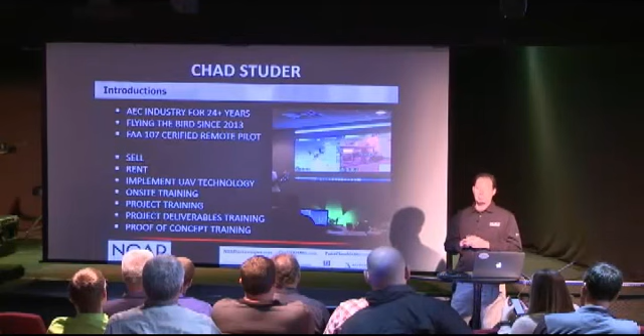All right, so now for the UAV and drone portion of the presentation. I kind of told you about my background with scanning. I've been flying the UAVs for a little over almost 5 years now. I am an FAA certified remote pilot. How many pilots do we have in the room? Wow, quite a few, right? So it's not too bad.

It's a 2-hour test. We'll be more than happy to help you. We have PowerPoints, study material to help you pass that test your first time. You can sign up pretty much anywhere and take the test. I think we ended up over in Canton just because we signed up for whoever could get us in immediately. I think it was August when they first announced the rules that you could get your certified pilot license.

We also do training on the drone. So if you buy a drone or before you buy a drone, you can come in, do 1 day. We teach you everything about the app. And it's not just flying it. I think if we go out in the parking lot and you fly the drone once, you feel like an expert and everybody knows how easy it is. Right? There's not much to it. But there are safety reasons, precautionary things when you're on site that you want to take a look at.

What happens if the battery goes dead? What happens if you lose connection? Just the things, why doesn't it connect? There's a ton of other things in there that you want to be aware of. When does it automatically return home? Is it 20%, 15%? So there's a little software package that we introduce you to. We help you pass, or study at least. We haven't had anybody fail yet, but we help you study for the FAA.

And then we fly the drone autonomously, and the second day is all about making deliverables. So extracting the data, taking photogrammetry, and creating geotiffs, point clouds, and kind of everything I'm going to show you today to give you an idea. We do online or on-site training, project training, as well as if you had a project you just want to try it out before you buy it, we would help you out on that as well and make sure it's delivered properly.

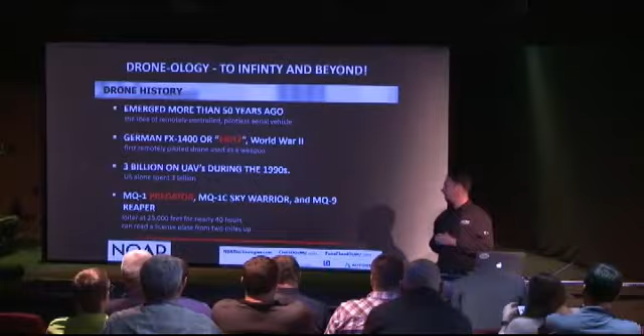It's a little fun here before we get started, just thinking about drones, and it feels like it just popped up yesterday. I think was it 2 years ago already? Amazon was, right before Christmas, telling everybody they're going to start delivering packages. Has anybody had a drone deliver anything yet? Right? So it's here before you know it. It's like the autonomous driving vehicles, right? The driverless cars. It's the same technology. It's just going to be here one day. We're going to wonder where it came from.

Well, if you take a look here, drones have been around for over 50 years, right? World War II is pretty incredible. If you look at that dollar amount, $3 billion, I kind of see why now my remote control airplane goes up in the air and it doesn't crash all the time. And it's remarkable what the military is using.

The Predator, think about it, it's just sitting up in the sky at 25,000 feet, and it can sit there for 40 hours and read a license plate from 2 miles in the air. Right? So is the government spying on anybody? So it's incredible what the capabilities are. Of course, ours aren't quite that cool, and they don't cost that much. But the idea of a drone and what a drone does is different than the way we think of a drone. Right? This is where the military is using it.

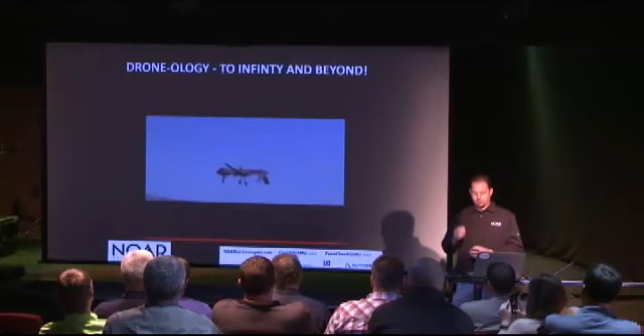They're sitting in the combat or in their own little zone here in the cockpit area, and they have a target that they're going to try and hit with it from 1,000 miles away, wherever they are. And it really makes you think differently when you use the word drone, what's going on with it in the military, how they came around, right?

I better turn that off real quick.

So right, they're blowing things up.

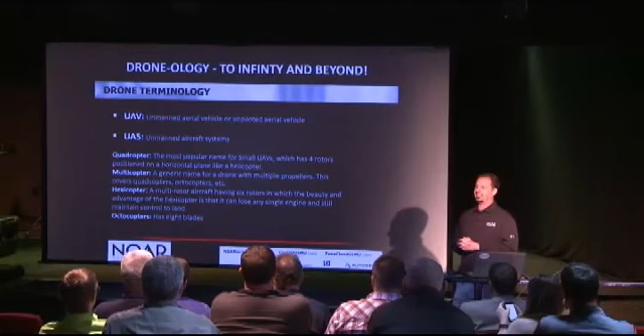So the idea of the name drone - some people say politically we don't want to say drones, we want to use UAV or UAS. I still use drones in all my marketing because that gets you more hits on YouTube or Google than anything else, so I'm going to keep doing that. It just sounds way cooler, but there's really no difference in terminology. I guess the military isn't going to say they're going to go blow something up with a UAV, right? In their language, quadcopters is what we're using.

Over there in the bottom is an Inspire, so it just has 4. As you look around the room, a multi-copter, a hexacopter - hexacopter of course is 6. We'll talk about the different ones we have up here as we move along, but of course there's also octocopters. Over to my left, I'm kind of hiding it, but this is a fixed wing as well. I don't know if anyone gets a chance to come up and take a look at it - should have hung that thing on the wall for everybody to see a little better.

So a couple simple things - you've got to fly the drone. A lot of people think it's complicated, so I want to point out how easy it is. The Inspire, even a Phantom, they're this big - I think we have one on the table over there. Most sites are 10 minutes, right? Typically if you use the Inspire you get 30 minutes to fly a site. I'll show you one we did in 10 minutes - it was 50 acres that we were able to capture.

It was a beautiful sunny day, so it was actually traveling autonomously at 32 miles an hour. That's the fastest I've seen it go, but that was outside of Michigan because it's always cloudy here. What happens is it flies, the camera has to focus, and if it's cloudy it will slow down maybe to 10 miles an hour. So it does depend on the weather how fast it can go - between 10 and 32, the weather can vary how much you capture in one day.

What kind of data do you get? Most people are going to talk about videos or just regular photos. Think about a geotiff, so it knows exactly where it is in the real world and you can drop it right in. Also 3D point clouds from photogrammetry - you can deliver 2D and 3D, and we'll get into this more as we go. But right now we just want to focus on photogrammetry, which is what we're using on any of the drones you see in this room.

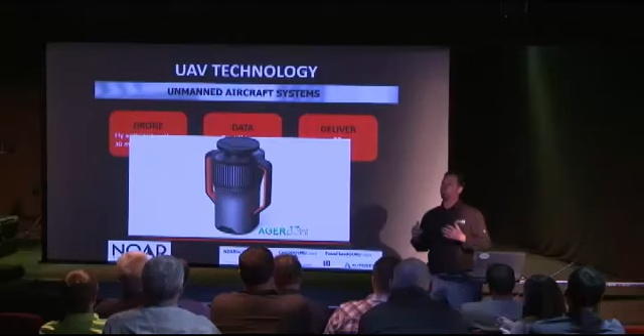While I was at SPAR, This is the one that intrigued me the most. I have absolutely no idea if it's any good yet or not - they had no sample data. They were just bragging about this being the next LiDAR data unit that you could put right on your drone. So we're anxious to see where this goes, and we're going to keep an eye on it, and we'll of course let you guys know if we throw this in there and get it working as well.

So anything, if you're flying autonomously straight down, you would have shadows, and you're not going to see everything. You won't see the side faces of the building, the windows, or the walls. It's going to block a lot of this. So you have to fly it to actually look at everything you wanted to capture in order to be able to put it together.

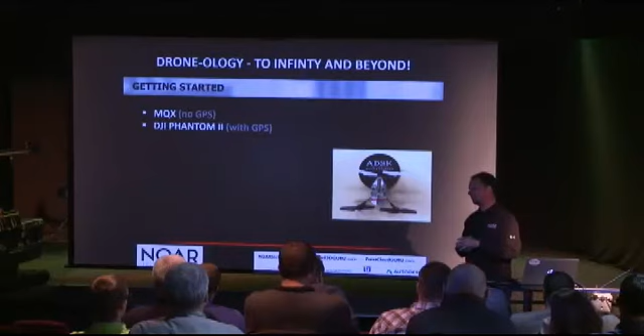I could do it, but I still wasn't good enough to go do projects and brag about it. Luckily, the DJI Phantom came out. I don't think we have this one, but we have the Phantom 4 back there now. And I just went out and bought it.

I had $1,500 in this little unit, no camera on it, no GoPro or anything. You couldn't see where you were flying, right? You didn't have the heads-up display on your screen, which was a good thing because I actually watched the drone. Most crashes these days, you're not watching the drone, you're watching your screen, and then you run into something. So it's kind of an old school lesson that you can learn to make sure you watch the drone. Turn off the heads-up display.

This has GPS in it. Has anybody flown a Phantom before or better? Almost half of you, right? So everybody knows how easy it is. You literally throw it up in the air, and I can talk to you and everybody in here, and it just sits there and it won't move. The wind comes by, it moves it, and the GPS moves it right back. It's instant response. Move it up, down, left, right. It stays right there. All of a sudden, I was an expert, just like that.

Just make sure you fly outside, right? So then once you become an expert, you're ready for the next toy. We moved on to the Inspire 1. A couple advantages of this we'll talk about.

A facade inspection, a little over 400 feet tall. You're looking up and you're trying to watch your drone. You want to make sure you're getting good information on the camera. Well, as soon as you take your eyes off and look back up at 400 feet, it takes a few seconds to locate that UAV again, that drone, and it can be hard to do, very difficult.

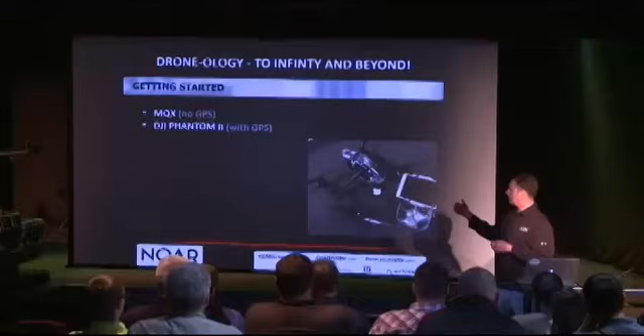So this is the only drone that I can think of on the market that has two controllers. One person is watching the drone, and the other person is just controlling the camera and making sure you're getting good video or good pictures of it. The other advantage is it has landing gear, so we go outside, it goes up in the air, and your camera never has the props in it. That was kind of a problem with some of the older Phantoms. And this camera does go up a little bit, left and right, and you can turn it.

So I said it was easy, so I wanted to test it out. This is my little girl. I think she was probably 3 at the time when she did it. She passed. You know, she doesn't have a remote pilot license yet, but we're working on it. I took it a step farther. He loved it, he thought this was the best thing ever. We have one of these on the desk if anybody wants to get it out, or Paige, if you want to break that out.

It's literally a Nano Drone, $20 on Amazon. If we get time, I'll fly it up here and show you guys. It's easy, buy 2 of them. The first one is practice, and I guarantee you crash it and break it. The second one, you'll get the hang of it and start using it to give you an idea. And just to repeat how much fun it is, you can see no matter what age, it's never a bad time to jump in and get started here.

All right, so as you're moving up, we're kind of looking at the different UAVs. You're really looking at the sensor, what's the megapixels on the camera? A Phantom 4 has a 20 megapixel camera, and so does an Inspire. So why should I get one over the other?

Depends what you want to do with it, right? What are your goals, what are your projects? The biggest difference for us was the 2 controllers was nice. Also, when you land a Phantom, it has a really small base, so when it touches down, it can kind of fall down or flip over, hit the props.

So we see a lot of people in the field trying to catch them out of the air. Well, then you're going to have a problem with somebody getting hurt. One of the times it's going to get their fingers, different things. You can also fly in stronger winds.

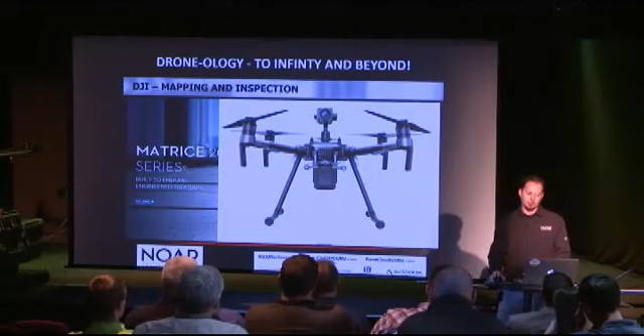And we'll talk about some of the accuracies later, but RTK is going to get you much more accuracy without any ground control. Ground control is still going to make it much better at the end of the day, so we always believe that you should use it, but if you had a site where you couldn't do it, RTK would really help.

Anybody see the Osmo yet? Anybody own one of these? Not yet? So we had Inspire 1. We updated the camera, so we had the camera laying around. It's 12 megapixels. We have one on the back table. If you guys get a chance on break or before you leave, take a look at it.

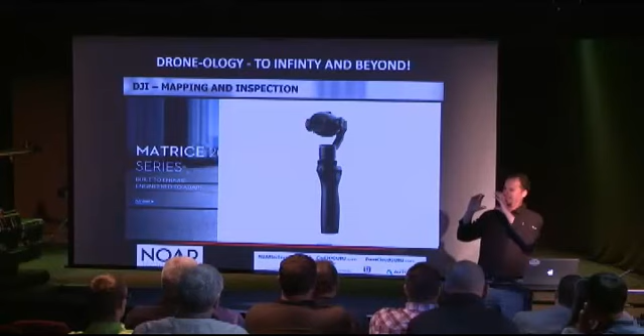Everybody's grown up. As a kid, you look at your Christmas photos, your birthdays, and what happens to every one of your cameras when you're watching that movie? It's up here, it's down here, it's over here, right? It's not steady, it's shaky. Or you're in the field and you're trying to drive a car and film something. So this uses the UAV gimbal. So as you walk, it knows to adjust if you're moving your hand up and down.

So if you're on a project site or need some good information or just want to do your kid's birthday party, this is the way to go. I think they're only like $450 maybe. Depends what camera you put on it. And then you just hook your iPhone onto the side so you can actually see what you're recording. And if you spot something and you put it on an object, you can literally walk around it and it will stay focused on that object as you walk around, which is kind of cool.

So I don't know if it's just me or not, but it feels like DJI has just taken over the world lately. I wish it was a publicly traded company. Everything, how fast they can put out this new technology, it's even hard for us to keep up. The newest one is the first-person point of view glasses.

So the difference between Inspire 1 and Inspire 2: when we got the Inspire 1, we had to look through our controllers to see where the drone was and where the camera was. If I'm flying the Inspire 1, I could only see what the camera was looking at. So if the camera's turned to the right, I'm flying blind, okay? The Inspire 2 has a heads-up display camera in the nose, so you're always looking at what the drone's looking at, and the other controller is looking at the camera underneath. So that was a nice little thing that they changed or updated on the Inspire 2.

Now imagine you're flying, and while you're flying, the person next to you puts on the goggles, just like we had earlier, which immerses you right inside the view of the camera. So now you can turn left, turn right, look up and down, and it's going to adjust the camera on the drone to what you want to look at, right? Structural analysis: I'm just a pilot, I don't know anything about structural analysis. I just fly over there, and the engineer could actually look and see what they want to look at, right? They could focus on this area without even knowing anything about the UAVs.

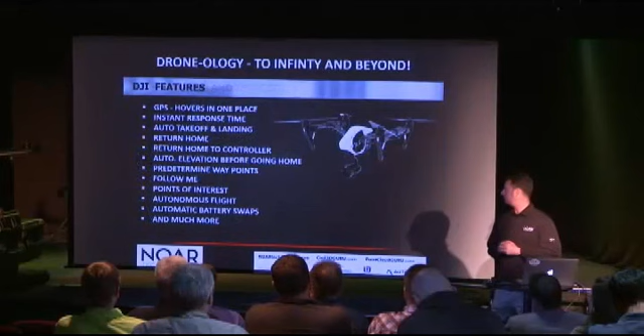Cool stuff coming. We were talking at the office, I'm just going to open something like an Apple store. There's going to be a DJI store soon. You're just going to go in, fly drones, cameras, look at all this cool stuff.

Any of the DJI drones that you purchase, and a lot of UAVs, have some of the same things. We talked about the GPS, hover in one place. We won't go through all of these. What I really like is there's auto takeoff, auto landing. So literally we go out, we map autonomous flight. You hit start, it automatically takes off from a Google map, flies autonomously until the battery goes low, automatically comes down, take the battery out, put another battery in, say resume, goes back up and does it again. It automatically lands within 10 feet from where it took off as well, right? It's crazy what they're doing.

The auto takeoff and landing is fun for some people, but it takes all the fun out of it, especially with an Inspire. You have to land it yourself. That's part of flying, right? We have to have a little fun while we're out there.

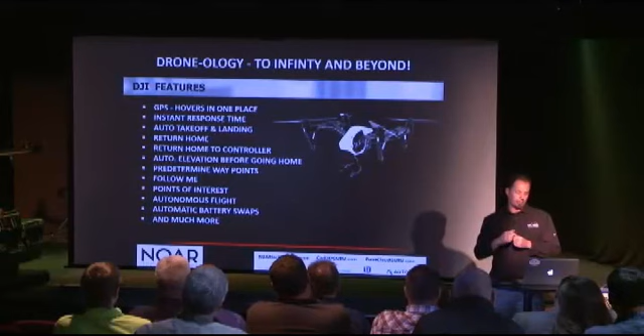Return home: if they lose their connection, they come back home. But it's also cool that you can update it to come back to the controller. So if you're walking with the drone, it won't go 2 miles back to where you started. You can update that home position. It would stop at the end of the project and come back to you if it got low on batteries or you weren't paying attention.

One of our favorites, or a fun one, I wish Tyler was here today because of the way we tested it. We put him out in the parking lot. There's a new feature that says follow me. So you take the drone and you say follow this object. And we said run, and he thought we were joking, then he took off running. The drone and the camera focus on that object that's moving, and it literally followed him through the parking lot.

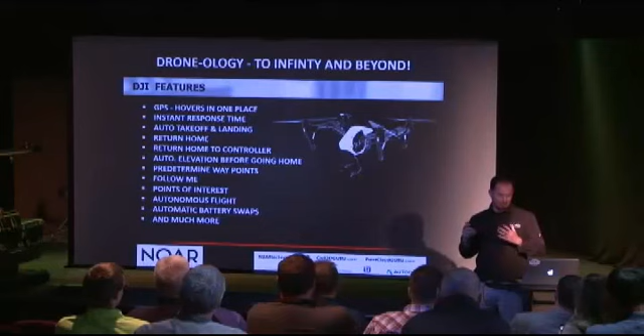I'm just glad I'm growing up these days, not back in my younger days. There's too many ways the cops could follow me now, right? With emergency and rescue, you can't get away from anybody these days, especially with a thermal camera. Now they're going to follow me with thermal, with a UAV.

So a lot of different things. I think we mentioned most of them. I thought this was one of the most intriguing too. I haven't tested this yet. I don't know if I will ever test it.

I guess before we talk about this one, there's object avoidance. So if I try to fly it right into a building now, it will literally stop 10 feet away from it. We have tested this. It took us a little while, we did it kind of slowly, but it works. It also works if you're flying 100 feet in the air and you're just slamming it down as fast as you can. It will automatically stop the UAV for a safe landing. It won't let you crash without the landing gear coming down, which is kind of cool.

But the best part about this is we used to fly behind a building. Let's say you're always supposed to keep eyes on your UAV, but if you were behind a building and you lost connection or you hit return home, they weren't very smart. They come straight home, so it actually hit that building, right? We had one, one of the first ones I delivered. We flew it, and then the client got the battery, put a new battery in it. It was the only one I didn't really fully charge.

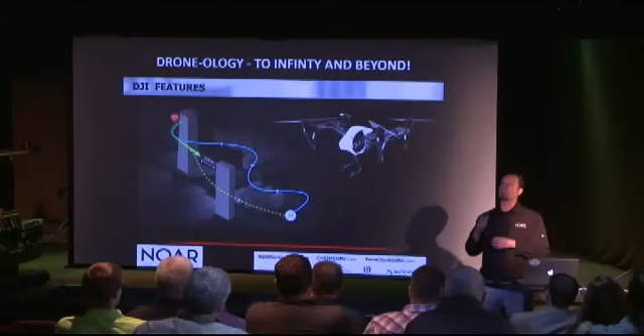We're walking around the building, all of a sudden the drone's moving. He goes, Chad, that's not me. That's not me. I'm not this bad. And I look, and the battery's low. And next thing we know, it's trying to return home. And it gets to the top of a roof, and it just lands on the roof. And it goes up again and tries to land and stops. So we had to get a ladder out to get the UAV back, right?

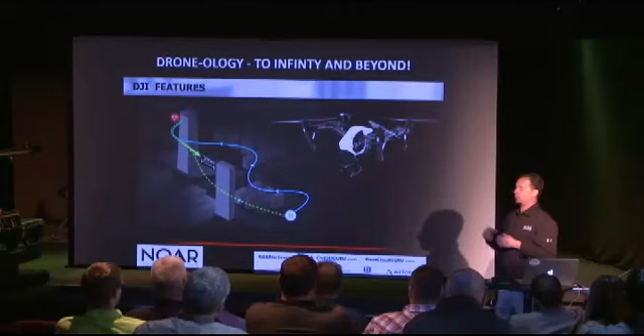So they're smarter now. And when they come home, they're smart enough to detect objects up to 200 meters away and fly back safely. I think that's remarkable for what they can do. Again, it'll be fun. Maybe we'll record it and put that on YouTube for you guys to see if it works out for us the first time, right? Or does anybody have a drone we can borrow to test that first?

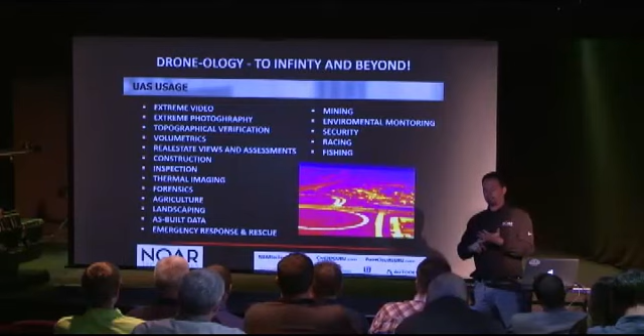So a couple things I want to talk about. As soon as you buy your UAV, the first thing you typically do is check out the camera, the video. When you talk to people, hey, what are you doing with your UAV? There's different types. There's mapping, there's inspection, but then there's others just using it for photographs, marketing, and video, right? A little bit different. Kind of separates the two a little bit. Although we have done some really cool things with video, and we'll talk about how you can use it.

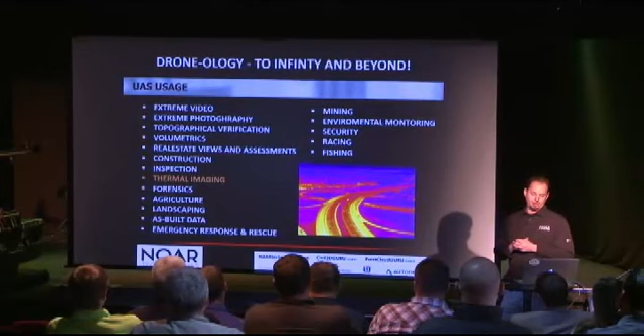Thermal imaging, like we said, will go on the Inspire 1 or the M200. We were lucky enough to put it on ours as well. We actually did some roof inspections. I just didn't have time to load all that in there, but we will get to that. Or if you need to see it, we can show it to you. We're hoping to do some really cool projects or test projects in the future. This was just out at our office, and just for fun, we wanted to see what it would look like, and you can see some of the buildings.

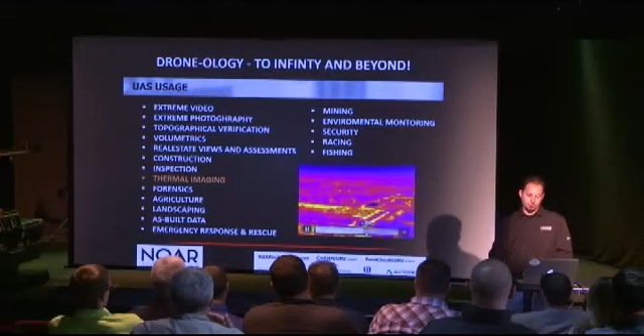The biggest problem is the resolution is only 640 by 480, so we're seeing if we can make point clouds from it and what you can get from it. So this was during the day, so you don't get much. It is kind of cool. I thought I had the highway, 75, in here, and you actually see the cars driving, and you can see the heat from the cars. I'm not over 75, it just looks that way. The 75 turns, but it's kind of neat. So if you want to see more on that, let us know for sure.

And then I'd love showing drone racing, but I talked too much yesterday, so I wanted to minimize this a little bit. Has everybody seen drone racing videos yet? A few of you? One of the best things you can do this evening on your way home, if you're a passenger, take a look at drone racing on YouTube. They're literally looking through the eyes of the camera, and they're flying very fast. They're little 2x2 boxes in arenas.

I definitely wanted to do that. I literally wanted to go. We turned the car around because I was afraid I'd have a new hobby, and I don't need another hobby, right? It just gets addicting to have that much fun.

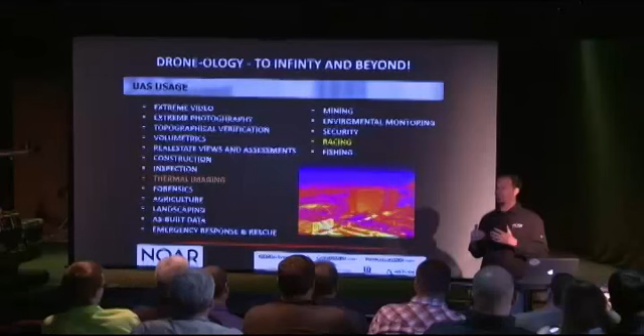Also, downtown Detroit, they're going through abandoned buildings. So if you look hard enough on YouTube, you'll find them. We're going to try and gather all these videos and put them on our channel and just kind of send you there in the future to see the best ones.

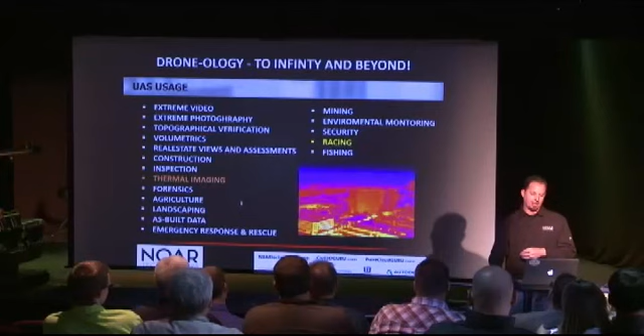I think the fishing one is very cool too. I think it's Florida. These guys are out on the beach, and they tie the bait to the drone, and then they fly out as far as they can. It's like a fish finder, right, with their camera. And they look down, they see all this tuna, and then they hit the button, it unlatches it, drops it, and then you see the tuna eat it, and then they just bring it in.

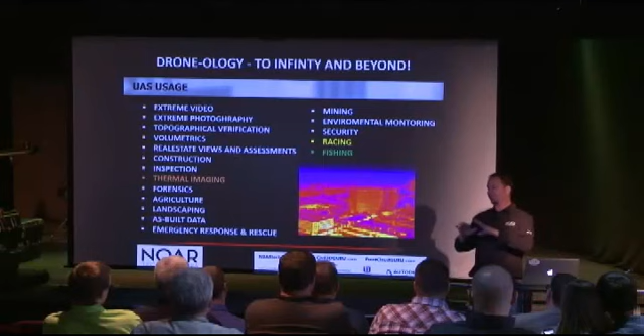Right, it's remarkable. I don't think it's legal. I'm not condoning it, but it was cool. One of the other really cool ones that I saw was someone was actually fishing, and the guy got mad because the drone was bothering the fisherman, so he cast it out, and he actually caught the Phantom, and they were arguing. They're going back and forth with it, so that was up there too. You can go all day with the videos up there and what people have done with the drones.

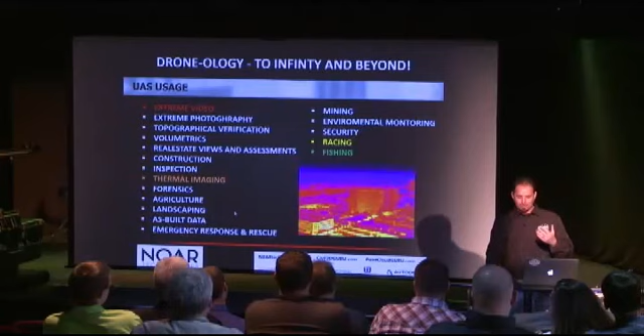I remember one headbutted a goat. I mean, it's just incredible. Thermal camera saving turtles. It just goes on and on. It's pretty neat. So when you talk about extreme videos, you could look all day and see if you could find the most extreme video, but I had to find an extreme video that related to mapping and inspection as well, not just a dirt bike or some mountain climbing.

So I was actually flying a communication tower with a client and kind of showing them how to use a UAV to do this. So this is my extreme video. If you look real close at the hawk, slowed it down just so you don't miss it. So if anybody asks you, are drone inspections any good, you can say it's the poop. Right? So we'll play it one more time just for fun.

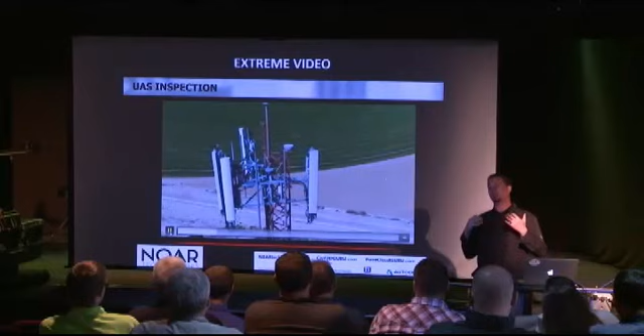The best part about this whole story, we didn't know it. When we walked up there, we saw the hawks. We knew there could be an issue. So as we got, makes me laugh every time. So when you get up there, I don't know if we're going to be able to fly it. There were actually 2 hawks. And as the drone gets up there, you could see the hawks kind of watching it and circling it. You know, from, I don't know, 350 feet down, you can't quite adjust or see the elevations. So when you're flying the drone, the hawk was literally starting over here, and it would go right at it.

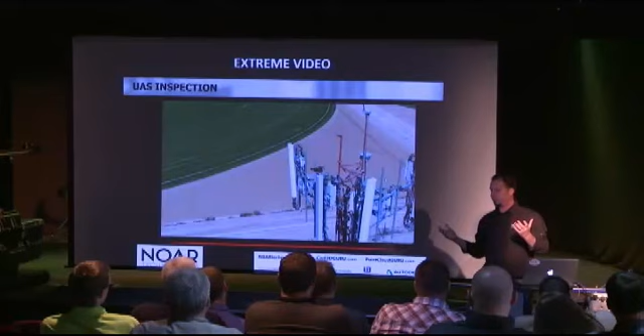So my only choice was, I had a flight to catch. We had to get it done. So I would just give as much gas as I could to go up, and I was just hoping it was missing it. But I tried it 3 different times. I wish I would have turned the camera right at it to see what it was really doing. Luckily, it didn't affect it in any way. It actually sat back down there, and we were able to finish it up.

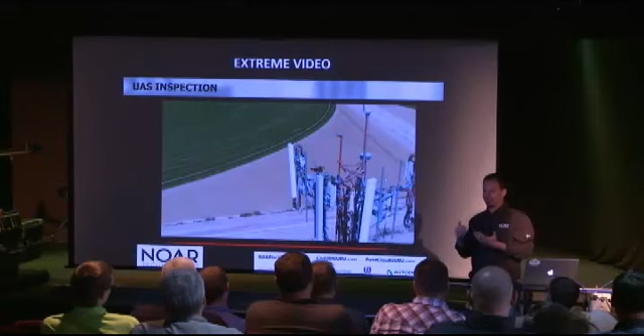The best part was I get to the airport, I see the hawk, I take a small clip, I send it to the client. I said, hey, look at this. This is incredible. That's pretty neat. He goes, Chad, that's not funny. I was the one on the ground doing all the mapping and the groundwork, and I thought it was just bad weather. It started raining. Now I know it wasn't raining. I couldn't believe he admitted that, but it made the day.

That was pretty funny. So our other extreme video here real quick is the Cadillac, the Book Tower in Detroit. I don't know if everybody knows about this building in the past. Dan Gilbert actually bought this. And if you think about it, and the more we learned about this building, New York City is doing mandates. I think Cleveland, Ohio is doing mandates that they have to inspect the buildings. I believe it's like every 10 years or 15 years that you have to do this.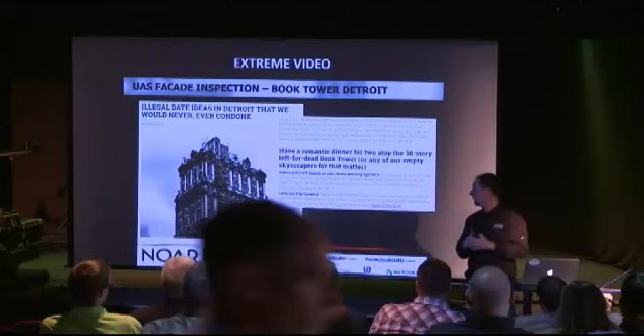So how are you going to inspect these buildings? And think about if you want to get insurance on a building you bought. What's the condition of the building? If you have a big storm, who's going to pay for that if there's damage? Was that existing damage or wasn't that existing damage? Especially when you talk about these kind of prices to purchase something like that.

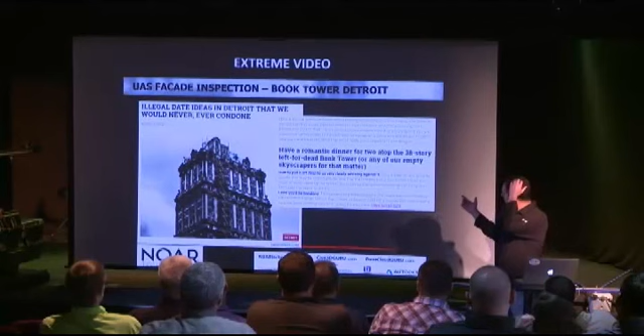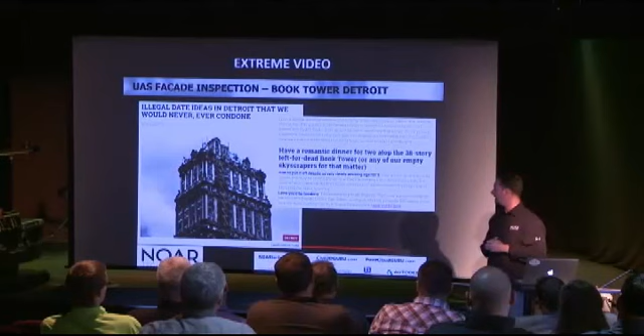So after we flew it, and I came home, I told Michelle, my wife, all about it, and she found this article, and we thought that was pretty neat too, where people in Detroit are actually going for, I don't know if it says cheap date or impressive romantic date. There's no elevators. The building's abandoned. They're walking up 38 flights of stairs to eat dinner, to have a picnic. I think I'd make it 10. Take me a week to get to the top, right? And I just want to know what date is actually happy with that to do that much work. But that was pretty funny.

So to give you a better perspective how big this building really is, I thought that was a good picture for it. And this kind of puts it in perspective a little bit. So this was a couple years ago already. This was actually, I did the Fisher building, so this was the second one we ever did. We did the dual controllers.

But you have to remember when we did this, we didn't have object avoidance. So I couldn't just go sit there 10 feet in front of it. It was just on your own. So if you hit the building, you're going to hit the building. I love how you look at the statues as well and the condition of them. And this is easy for an insurance company to go back and take a look at this. You can extract every photo from the video, and then you could zoom in on every one of these photos as well to get much more quality if it's needed.

And I still can't believe the amount of detail that they put at the top of these buildings. Right? Who can see that from the ground? So unless there's another skyscraper, you wouldn't even see this. We get up there, you start seeing the graffiti, so people are up there. They're going all the way up to that penthouse. I believe this is a working penthouse now, from what I heard, or it was for sale at this point for the top of that.

But it's pretty incredible. So think about if you're going to do facade inspections, you have to do scaffolding, right? So what we heard is they started doing scaffolding on this building. At the end of every day, they start the next morning, you had to check your gear. You had to walk up all 38 flights of stairs to start your day. So imagine tomorrow when you go into work, you think you're having a bad day. Think about what those guys had to do, right?

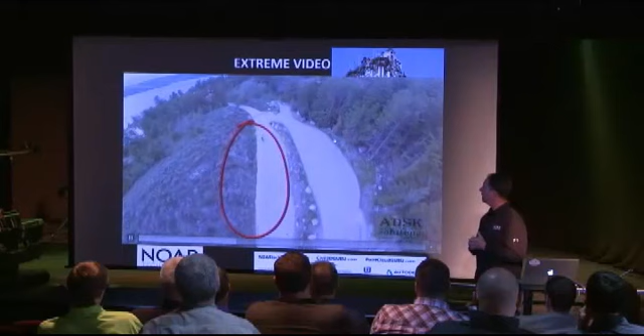So this was a park in Wyoming, a state park we got permission to fly. The real project and why we're really there is the Pro Scan, that they were actually pushing this cart and capturing it like mobile mapping. And they just had to get the limits of all the asphalt and the gravel. And while we were there, one, I got to fly a drone legally at the time with permission, so we couldn't turn that down. And it just validates it for the client that they got all the picnic tables and the information was there.

So I forgot to show you when we started, it was no wind at all. 2 miles later, you can see the storm came in very quickly. There's actually white caps in the water now. I was still back in the days of the Phantom 2. Notice the wind over there on the right. All we have to do is get to the back here, and we're done. So we're like, let's keep going, just keep going. Well, how do you do 2.5 miles where you have to keep eyes on it all the time?

So I had one person drive the truck, and I sat as a passenger and flew the drone while we were in the vehicle. The wind was so strong. Look at your bottom left. The Phantom wouldn't go anymore. It just stopped. So I got out, and it's easier to navigate from behind a drone. Made the mistake of trying to turn it. The wind caught it. Luckily, it was above the tree. So if it's windy, just come straight down so you guys know. Don't make that mistake. I got off easily on that one.

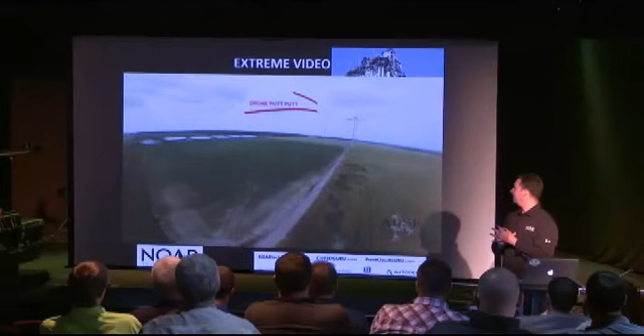So my in-laws live in Bad Axe, Michigan, so while we're up there, why not? We got to have a little bit of fun, right? Unfortunately, Michelle was with me, so I didn't get to actually run through them or actually do the putt-putt. And it's private property, so she made me park over 400 feet away. So if you see here, from a GoPro perspective, you'll see how far away we were and still able to get incredible data on these wind turbines. So there we are way back there at the point, right?

And we're standing at that location as well. But that was a good experience. I still have a goal of doing wind turbine putt-putt.

But I heard it's not the drone you got to worry about. If you chipped one of those blades, someone told me how much they were at one time—it's insane. So just cell tower inspection, you kind of saw we did that earlier. Very easy to do. I'll skip through here to see if there's any other ones.

Stockpiles, we'll talk about a little bit later on. Very simple to fly over. Just kind of notice the mobile is there. Actually, I was with a person there that's in here.

There we go. Did the Mackinac Bridge. Probably wasn't the smartest thing I did a while back when I first got it, but legally, as long as you weren't flying commercially, you could fly in certain areas. So it's all the way in the UP, and on the way back, I was getting tired. I was just bored, so I got it out, and I'm like, I'm going to fly the bridge. I'm going to at least fly to the first abutment, right?

Then I started thinking, isn't the Port Authority like right over here? And then what if it goes down and it's iced over? I'm not going to go get it. But it made for a nice little video.

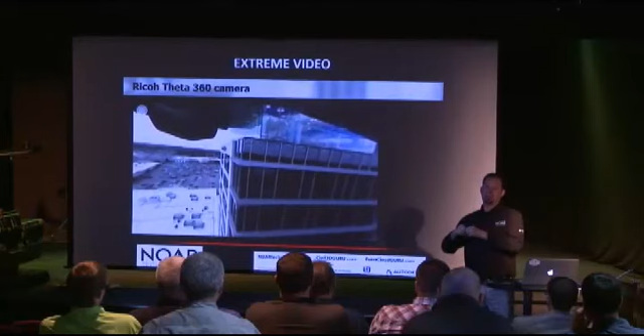So my son just turned 2 last week. So at the birthday party, we set one of these right in the middle of the table. And instead of just seeing his face when you blew out the candles or sung happy birthday, you could spin it around 360, show him everybody that's at the party, and kind of enjoy it. And it's just a lot better environment, so especially for that cost. So that was pretty neat to do.

I can't remember, I think we went around and just did this whole facade on this one. We have other videos we just mapped with it to kind of show everybody autonomous flights as well. This one was kind of cool. So from that location, I just want people kind of thinking mapping and inspections.

You can also do streetscapes. So typically this would be maybe a scanning project, but if it's just conceptual data, this is the one we did in 10 minutes. That entire parking lot, 32 mile an hour, a nice sunny day, and then I flew the face of this building.

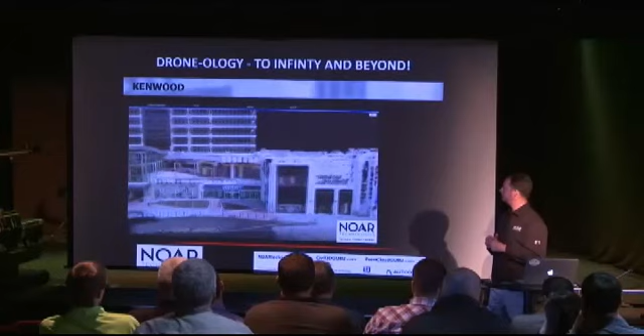So this is all drone data, right? No laser scan data this time. Now I'm making it look good here, right? It looks perfect—why would anybody ever use a scanner? There's a big difference. So when you zoom in, that's where you're going to see the big difference on this.

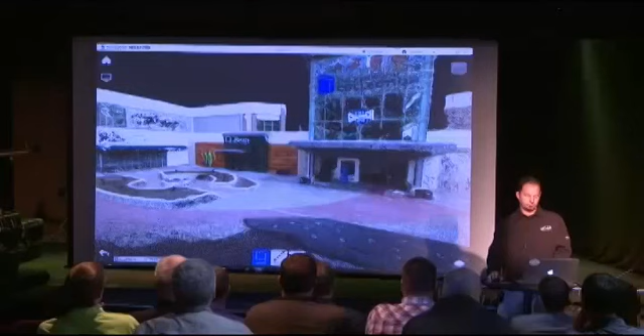Let's see if I got this one. So from here, I mean, it is truly remarkable for conceptual or renovations or stakeholder buy-in. This is all from the 20 megapixel camera, right? Curves—so if there's pieces missing, that just means when I turned it, I didn't turn and get enough photos on that actual face. I kind of did more straight on and then tilt and turned it a little bit as we went. You can see it didn't do quite a good job on the glass.

But overall, depending on what you're going to use it for, maybe you're going to renovate a streetscape, it's an incredible place to start to bring this into different software to help you do that. So the big difference is it looks incredible. Scan data, you can pretty much zoom in forever and it still looks incredible.

As we go in here, you'll start to see this is getting rounded, and it's just not quite the same level when you look at the detail there. See how it's getting a little bit curvy, right? So typically not engineering grade, but depends what you're going to do with it. So more conceptual, more visual information, and you can see it's a little more rounded the farther back you go in the different locations.

But still, for photogrammetry and how quickly you can do that, I think it shows a good picture. While we're here, I'm going to show one other quick parking lot to give you an idea how quickly we can capture information.

I think one of the clients that we did this for is also in here. But this is, I don't even think this is more than a 10-minute flight. We were out there, it was such a simple flight, we actually flew it both directions. So kind of longitude, latitude, or kind of crisscross. So you do it this way, and then you go perpendicular to that flight, and then you just take the photos off the drone, drag and drop it to your software.

It automatically puts it together, spits back a point cloud. Sounds easy. I don't know why we have weeks and months trying to figure out these workflows, which ones are the best. But if you just did this, you'd probably be within a half a foot in the real world where it's going to drop it in from the GPS on the drone, which is pretty good for certain things, if that's all you need.

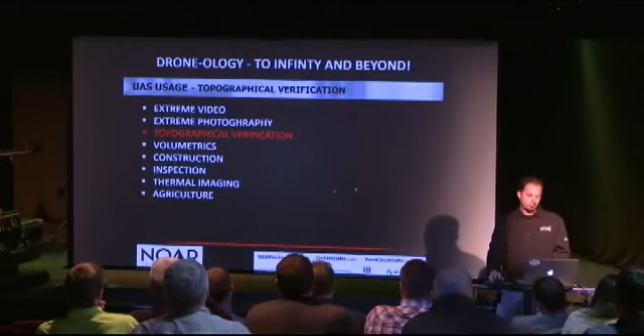So video is pretty easy. Hopefully some ideas there where you can use it. Typically, you might just want to take photos. I think every surveyor should already have a drone in every single truck, especially if you take the amount of equipment that's in there and the expense that's already there, just for validation, right?

Just go out there and just tag everything that you think is different. So handicap stalls, catch basin, manholes. It just eliminates the communication gap that you might have as a surveyor and engineer to say, hey, was this, where was the entrance? What type of curb was it? You have it all documented, and it's super easy to do. Literally pop it out, fly it in 10 minutes, put it back in the truck, move on. You have updated Google Earth images with no arguments or anything to discuss.

Another common use for video is construction. If you tear out a roadway and put it back, the owner always says that driveway was way better before and wants you to fix it or pay them. You just go back to the video right in front of them and say, let's look at your driveway - wow, that looks way better than it used to, right? I think you owe us money. And they walk away. As soon as you say you have it on video, they're gone.

It takes 10 minutes to fly a waypoint from one point to another along a roadway, however you want to do it - walk it or drive it, different ways. As for how to use it in construction, I won't get into a whole lot since I think it's pretty common.

Validation is the same thing - maybe you just want progress for weekly project meetings. Where are we? Where should we be? Is it on schedule? Are the materials on site? I like the idea, instead of using a PDF, of loading the actual DWG over top of the updated photos to make sure everything is still planned and adjusting accordingly.

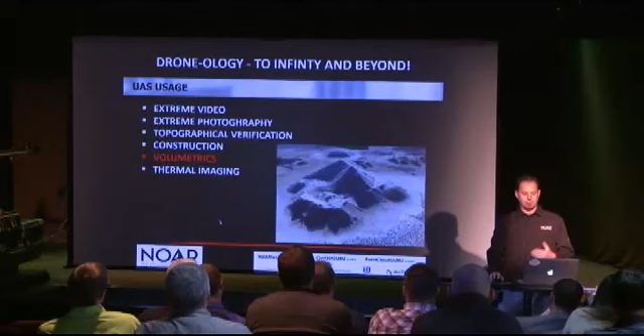If they want point clouds, you could do that as well. If you buy a drone, the easiest place to start is to get volumes. Every time I show somebody how to fly over a pile and get that dirt pile, they're always amazed how clear and accurate it comes back. So if nothing else, you could get into it just for that reason - it's one of the easier things to do rather than extracting data for parking lots.

So now to talk about autonomous flight - we did the video, we know how to take the drone and snap photos. This is just as easy, maybe even easier, if someone shows you how to do it.

In this case we recommend an app - I think it's $20 now, I thought we paid $10, but I think it's $20. It's called Maps Made Easy. There are other ones out there: Pix4D, Drone Deploy. Autodesk just came out with one they're recommending called Site Scan, I think, which runs around $4,000 to $7,000 a year. This one is $20 and does kind of the same thing. DJI also just came out with their own app to help you fly a site - it auto takes off and starts taking photos.

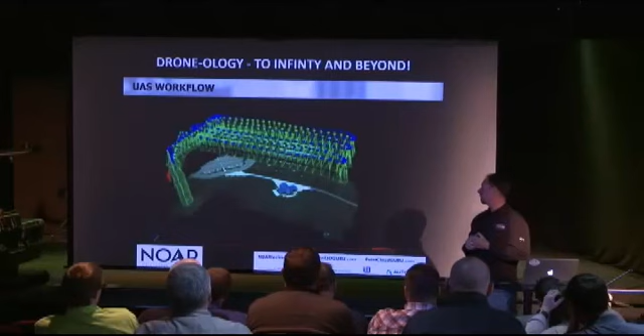Paige, did you happen to get that iPad set up with DJI 4 and Maps Made Easy, or no? Let's try it real quick - we'll try it just for a second. I don't want to keep switching this around. And what happens if I go to the iPad, I have to mirror it to my desktop because we don't have enough cables, I need a splitter. So let's see if this works real quick.

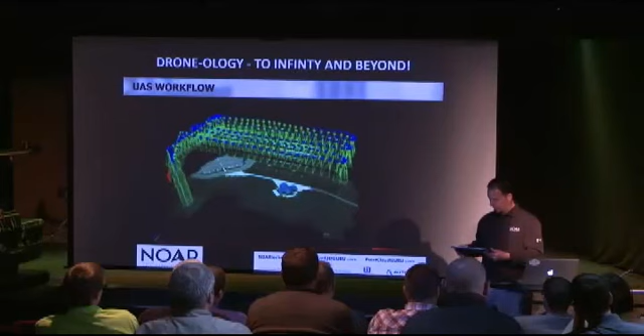Cool, nope, we'll try it real quick - it might take a minute here. The only problem we might have is I don't think we did the DJI 4 account on this one, did we? Let's just skip it so we know. We'll show you on the little iPad, just so you know how easy it is. When we go outside you'll get to see it too. I just thought this would be a bigger screen so you could see it a little easier. But let's just boot this up real quick and show you - we can pass it around if anybody wants to see it.

Oops. So we just connect them. Everybody's watching, so you know it's not going to work - I'll forget something. Let's see, I got it plugged in. Step one, we're good. There we go. So we'll give that a second.

That's how easy it is - you literally pull it out of your car, pull it out of the case. If anybody wants to see the case, it's not as big as this one, but it's a pretty big case. The idea with the case is it just keeps everything with it. If you have two iPads, the camera, you don't have to take anything off or put it in landing mode - it literally goes into landing mode in the different cases it comes in. So it's just easy to move around and work with.

The reason I was moving that - I don't know if anybody can tell yet, you won't see it yet. You guys are on TV, instead of me up here I got all you guys. Yeah, can you see it? And then with the controller you can move the camera up and down - it's kind of cool. Who just flipped me off?

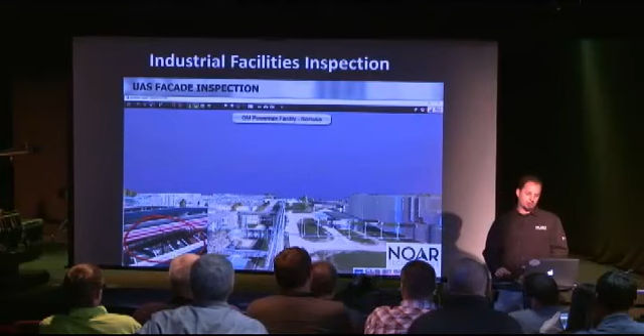So this is a project. It's probably one of the better ones that we've done. It kind of sums up everything with UAVs and an idea of what you want to be able to do with them in the future very quickly here. So the big thing before I started this, I want everybody to focus. This was the goal. They want to be able to find fiber optic cable in that level of detail. They actually want to see the casing and take a look at the wear and tear on the casing.

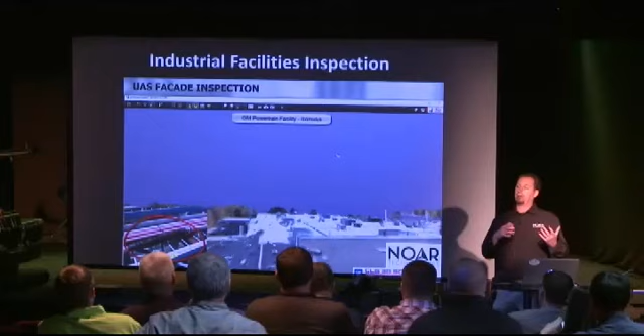So General Motors decided to fly, I believe, 31 of their sites across the country. They use LiDAR data from a helicopter at 500 feet. So this is the data in Jetstream that we're flying over. It looks good. The best part about what they did here was they got this data in front of the facility managers, right? The maintenance, the plant managers. And by doing that, they wanted more information. Hey, this is great. I want this. I want more. I want a higher level of detail on all this.

It's incredible. So we propose that you go out and you fly the drone over your site. You put out your control, your targets like we talked about. We'll talk about targets in a little bit after this as well. Again, more than 4. I'm just showing that because I'm lazy and it took me that long to put the X's there. I love the autonomous flight. It's going to do the same thing outside, like watching paint dry.

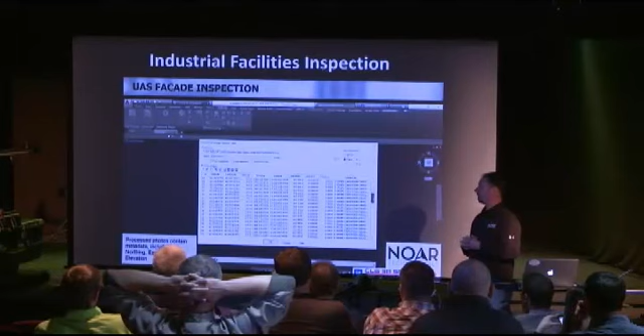It's kind of cool. As it flies autonomously, it's taking all the photos. It calculates the photo, calculates the overlap. The green and the blue is where the actual drone was, where the software corrected it to be. Remember, it's always going to be within 10 feet. So we take all these photos into the cloud. We take all the metadata from all these photos, and we're going to use it here in a little bit. And that's how we make the deliverable a little bit more appealing to the client.

So in this case, we open up Civil 3D. We have a Bing map. And the first thing that you can propose is we just want to give you an updated GeoTIFF image, and you drop it in right over top of it. Right? So maybe that's all they need. I don't know if everybody's familiar with the GeoTIFF image, so we're going to go in here and just show you that it's a 2D TIFF. A lot of times, these facilities, all they want to do is trace the existing details in 2D. They just need to have a plan and metrics of that roof, right?

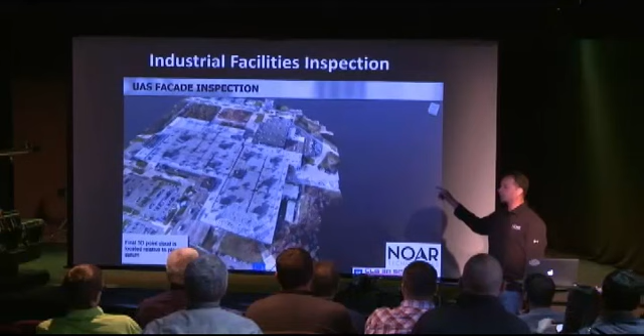Simple. Imagine going up there and doing GPS to get every one of those measurements. Imagine a tape measure, right? Robotic total station. Wait till you see the buildings we did that we show after this. And that was the 3D point cloud that came back from it. Hopefully you guys saw that a little bit there. So what we did is we brought in all the photos where they were taken at the right location. And now these yellow dots were the autonomous flight over the whole building. Okay? So they didn't really need that.

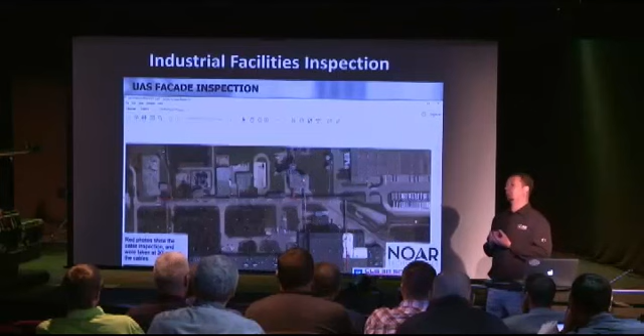This is what they really wanted, 3.5 miles of the fiber optic cable tray, for example, I guess. So what we did is the exact same steps. We flew the drone only 30 feet over the pipe instead of 300 feet over the building, so we get a better level of detail. You can fly it autonomously from one point to the next. You can set up a way to do all of the mapping autonomously if you want to.

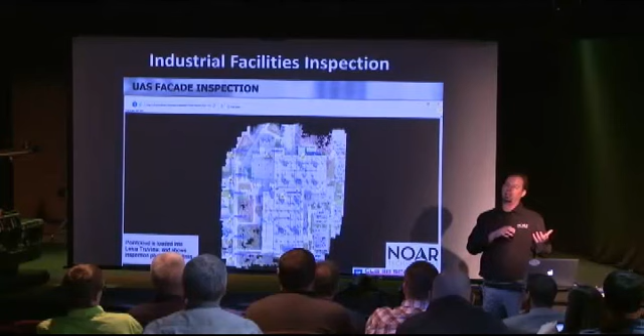As we brought in all the images for the metadata, we linked it to a PDF because at this point, to us, we didn't want the client to have any software, right? We don't want any plugins, just PDF. Everybody's used to it, everybody can do it. They wanted it, of course, it wasn't good enough. They wanted it in their existing infrastructure with all their point clouds and laser scan data, which is the TruView Global that we talked about before. So we were able to do that as well.

So now we're actually in TruView. So the maintenance, the plant managers don't know any different. They click in TruView, open it up, and zoom in on the photo. So you can see we just tagged different locations for them.

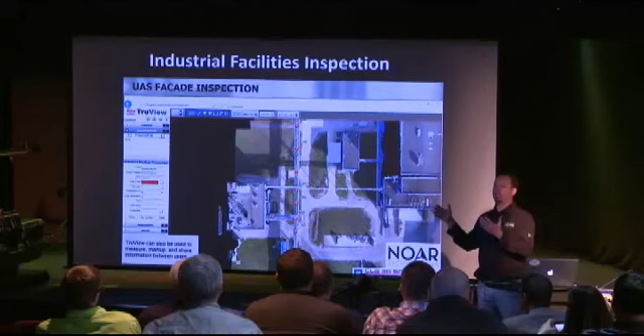We did this manually. We went to Leica and showed them what we wanted to do. The next release is supposed to be May 1st, so let's say May 30th, maybe June 1st. They incorporated that you'll be able to bring in the metadata automatically for every photo location to make a geotag. So you can click each image like we did with the PDF. So it's really cool what's going to be coming.

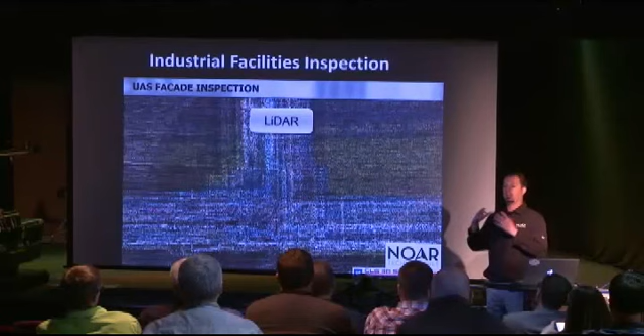But think about that. You zoomed in, you found a problem, you marked it up, right? So now give it to the maintenance. They're going to go back and fix that little area. LiDAR data, the geotiff. Everybody's like, why didn't you just give them a geotiff? That should have been good enough, right? It was blurry. That's just 30 feet above with our photo. So there's kind of your comparison. But watch, you can zoom in, from 30 feet with that image, and that's the quality that we're able to get, right? Now let's go survey this one.

That's a big project. If you got to go out there with GPS, laser scanning, mobile mapping, right? That's going to be hard to capture a lot of that data to start engineering off of it. And maybe you just start conceptually with a visual inspection with the UAV, and then at least the engineers can kind of focus on what they really need and the level of detail they need, and then you can go out and scan certain areas of it instead of the whole building. So I thought that was a good use case, a way of getting companies into new technology, give them a little bit like they did with the LiDAR, and then they just wanted more and more and more, which I thought was pretty cool.

All right, so the targets that we use, hopefully in the back you took a look at some of them. You can use a $3 vinyl peel off that you might have in your kitchen floor, right? You just stick them down on the ground. They're pretty cheap. We cut a little hole in them, and then you put it over your PK nail. They will work. It's a little windy, they're going to blow around a little bit. If someone drives over, you can see the creases. So they're better if you're not going to go back and get them, or they're not real important to you. That's kind of the cheapest way to get away with them.

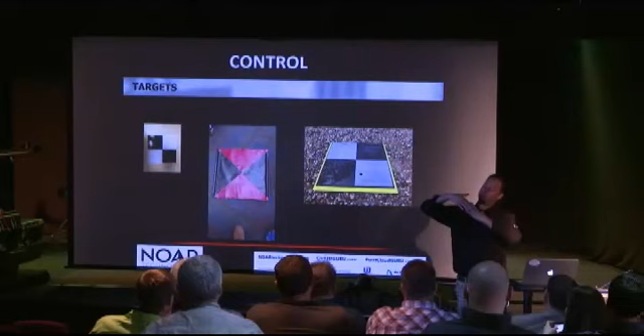And it would also give you an idea of what's going on with your scan data, make sure it wasn't tilted or your floor wasn't way off, right? The other thing with the targets, you can see they're waterproof. I don't even think we asked. We just took them out. We wanted to get it done right away, but they're still working as well. You simply turn them on in the order that you walk around, and then you collect them in the opposite direction. They are supposed to be out there an hour.

We've done some in a half hour and still got good data out of them, but they do have to kind of do that solution and get the correct calculations. So it's up to you. Some sites you don't need to be there an hour, but by the time you talk, set these out there, it seems to work really well. You walk up with your phone with the app. Before you turn it off, it records the value of where it is. It sends it to the internet, the cloud, and then it comes back and sends you an email with the exact coordinates of the locations.

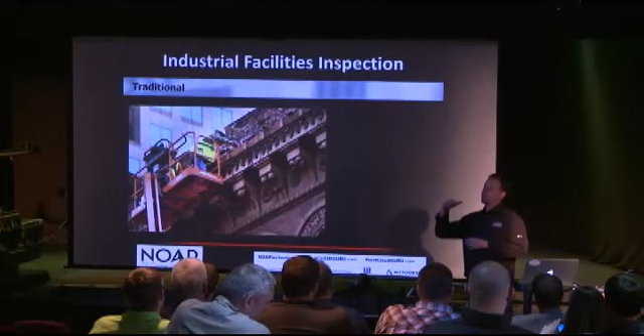So just again, kind of thinking about the facade inspections and how we do all this traditionally, right? You put a boom truck up there. GM, that site with the fiber optic cables, we told them how much money we thought it would save them, right? We were like, this is remarkable. How many drones do you want to buy? They didn't even care about the money. It was safety. They don't want the inspections, anybody walking on cable trays. They don't want the people up on the boom trucks. It was more about safety, and you can't put a cost on safety was their thought and why they want to keep moving forward with the UAVs.

Again, just some examples. Imagine that Book Tower and kind of going down with this, 38 stories. It's not going to be safe, right? So that's something else you're eliminating. I understand that maybe you have to knock on the brick or the facade to see the condition of it. Ours is visual, but maybe we can narrow down to where we feel you have to go do that actual hard inspection and not do the entire building like you might see in some of these other ones.

So here's kind of what we talked about. With the Book Tower, it was all video. It was a great idea. We were just happy to be able to complete it and get it done. Extracted the photos every so many frames. But at that point, what do you have from all these photos? You have a stack of photos in Windows Explorer. Basically, they're scrambled everywhere when the client says, this is photo one, what the heck does it go to, right? How do I put this and relate it?

So somebody had to go in there in that deliverable and say, I'm going to make a legend, here's photo one, it's this corner, here's photo two, here's photo three, and make hyperlinks, right? And they manually had to do that with each one. User error, right? They're not going to get every photo right. They get tired, they get bored, they don't double check it. So what we wanted to do is fly the drone and then link each of the correct photos in the exact location it is automatically.

So just like we did for the roof inspection, right? We brought in the metadata on top of it, and they could click it and just look at the data instantly. So we figured the same way flying the facade vertically would do this. During our attempts to make this work, we were super excited with this one. Anywhere that you flew the drone and took a photo, you hover over the drone location and you can look at the photo. We were so excited. This is great. We're rolling over in the back of our chairs. We're done. Everybody wants this one. The problem is you can't zoom in on that photo.

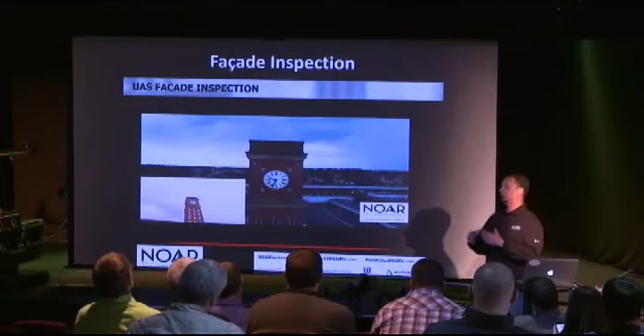So the other problem was, in order to do this, you had to have a plug-in software. So now everybody that we delivered this to couldn't do anything with it unless they bought this tool. So we had to figure out a better way of doing it, and that's where we started flying it and then taking each of the metadata and putting it into a PDF, which worked a little bit better. But at the end of the day, the TrueView solution works out the best.

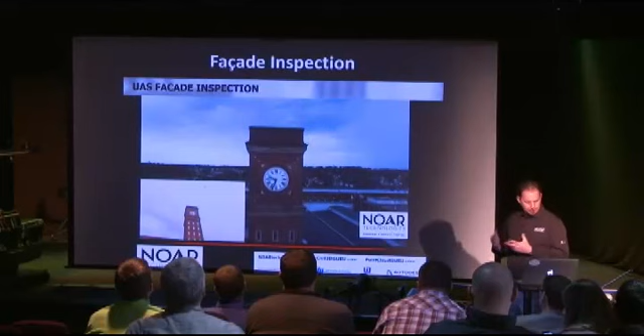So we had an opportunity to help a company fly Goodyear's headquarters. And this is a clock tower that we went and tested out. This is the Osmo, so you'll notice it's nice and smooth video. It's not real jerky or anything. This was the building, so we kind of flew up there. I forget the elevation. I think it comes up and tells us 165 feet or maybe 265. I can't remember. 165 feet above the ground is all.

So same idea. We just went up. I think we did some quick video just to kind of capture the site for the client. We went all the way around. And then the idea and the goal is to go back and fly it autonomously straight down, take the photos along it or at points of interest, to have it go around like we did for the country club, and then bring the data back in. So as you see here, this is kind of a video, and now we converted it, and there's the point cloud data all from the drone that we were able to capture.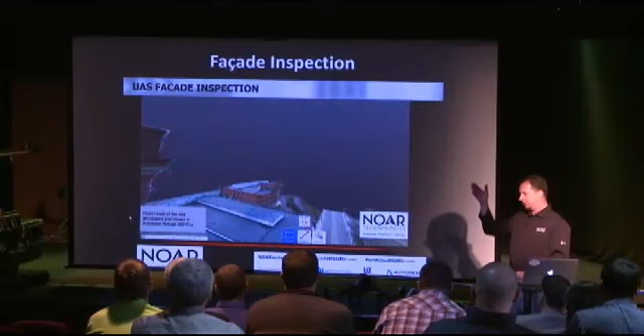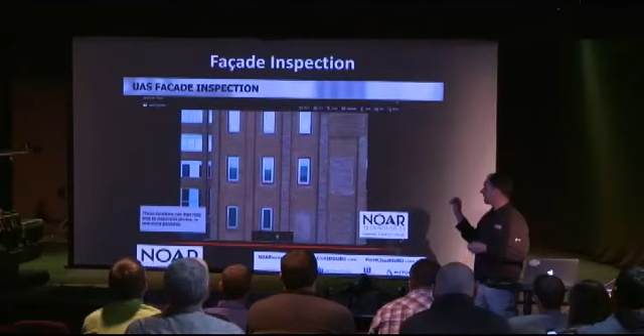In this case, we got a little bit lazy. You saw the white noise along there. You open that up in Recap or Cyclone, quickly clean that up, and that would go away. Depending on what platform you use to create the point clouds from the drone, the noise can be a lot more than others, but that was all UAV data, and we brought it into TrueView, and the same idea. This was just a concept. I really just wanted to fly a clock tower. So it's not a completed project, but it gives you a really good idea how each image tagged in a vertical aspect instead of a roof can be used.

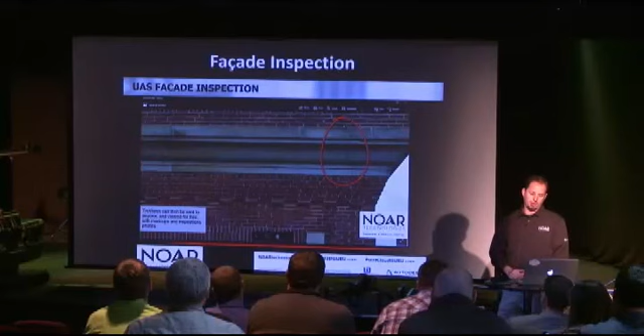And there's some really good points here as you zoom in on the brick. I think we're approximately 30 feet away, so I believe they're going to get this project, and now they want to fly it using the object avoidance at 10 feet away to get even more clarity. So again, you can mark it up, you can send it to anybody with TrueView Global. Any client can open it up on their phone or their iPad if you put it into TrueView Global to share it. So you don't have to send them any files. You don't have to send them 2 gigs of photos. You don't have to make sure the hyperlinks work. And it seemed to come together real well for them.

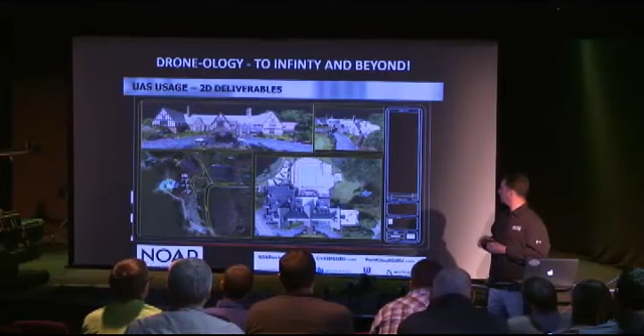And then back to, not everybody has to make 3D deliverables, facade inspections, roof inspections. There's some opportunities to do that. We had the Revit model for the renovation on the country club, but you could do something a little bit more simple. Just go out, map it, and do 2D planimetrics, right? Not everything has to be 3D. 2D documentation is still very popular.

You just go on top of either the GeoTIFF, like we talked about with the roof, or you go into the point cloud and you simply trace it. You can do it with Recap and Civil 3D. You do the same thing in Revit if you want to draw the walls or the buildings. If you want to find the top of curbs or highest, lowest points, you're typically going to use a program called CloudWorx that we talked about earlier.

Also for topographical maps, can you make a surface from scan data or from drone data? I constantly get phone calls or people complaining, I just scanned the site and the data is worthless. I can't even get a TIN out of it. I can't get good contours out of it. Well, the problem is you scanned every 1/10 of a foot, 2/10 of a foot, right, for 100 acres.

So when you build a surface from that, does everybody know in Civil 3D, if you click a point cloud, it will automatically connect and build a surface from all those points? Okay. The default is, I think, 2/10, and it will triangulate between 2/10, right? So if there's a crack in the pavement, your contour is going to try and follow that. So what happens is the contours look horrible. They're too ziggy-zaggy. I want to smooth them out. In that setting, just change that setting to 25 feet.

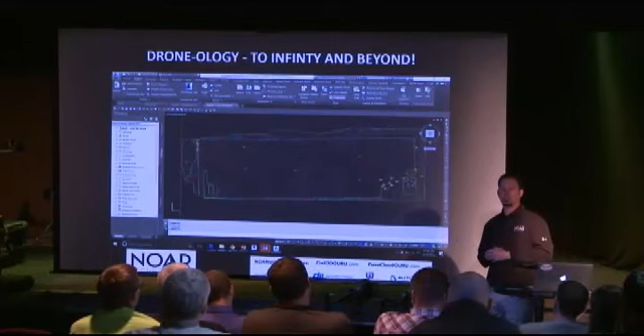How would you do it manually if you're out there with GPS or driving a four-wheeler with GPS, right? You'd probably be every 50 feet on a grid, every 100 feet. So type in 10 feet, maybe 25 feet. And if you do the spacing accordingly, then build the surface, the contours look just like any other typical application, however you did the data. Okay, so there's always a few tricks out there that can help you get the data.

If you're using CloudWorx, you can also go to CloudWorx and say insert points on top of my point cloud, a grid of 25 feet by 25 feet, and build the surface from those points. Okay? You still got to go back if you want a very nice TIN and get break lines. We got to trace the top of curb, the gutter lines, any major grade break, right? You still have to do that. Piles of dirt, rivers, banks, top of bank, to get a good surface out of it. But you combine that with the point cloud or the points you included, and it should come out real nice.

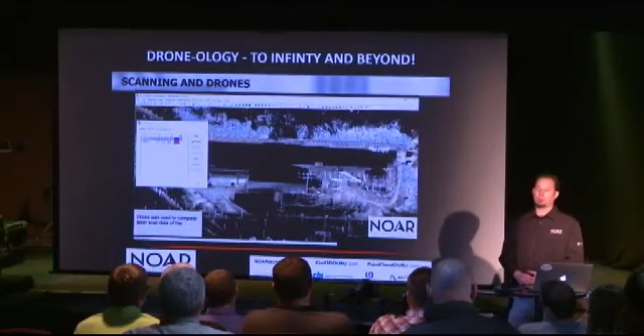So we could do a little better on this video. I wanted to show that we are doing this, that you can do this. I get a lot of questions: can we tie scan data and drone data together? You saw the country club did that a little bit. This is a little bit higher profile project, so I kind of blocked out the name here. This is a 400,000 square foot building. They went all the way around the outside of it and they scanned it. So you can see we have 2 different colors here. That's the drone data that we were able to capture on the roof. The rest of it was the scan data going around.

So all we did was set control points out on the site. And as you set the control on the site, the person with the laser scanner has to tie in the same control that we hit with the drone data. So as long as you do that, they're going to tie together. If I just go out with the drone and fly it with no control, no RTK on here, I'm going to be about a half a foot off. That's why the country club is off a little bit. We didn't have any type of GPS survey control. We didn't have the cool targets back there. But if you tie in using ground control, you should get approximately 2/10 to their scan data.

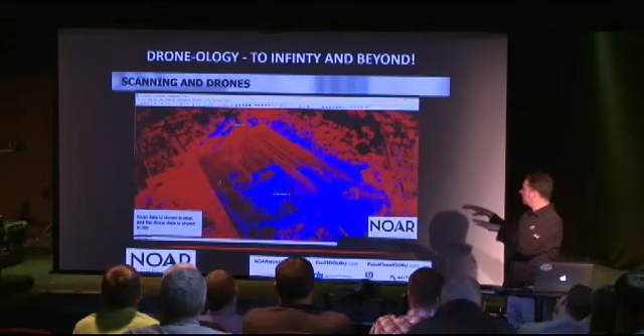So what we did is just threw it into a program, separated the two here, the red and the blue, so we knew which one was which. And then we just cut sections in here to give you an idea. So you can see on the roof there was a hair of difference, but there's your ground data. It's kind of a small inspection to give you an idea. It's really hard to tell, but if you looked real close, the scan data is a perfectly straight line, and the drone data has a little bit of a wave to it. It's hard to tell here because of the black background, so don't think they're the same thing.

If the scanner can't get on the roof, the drone is a way to fill in those shadows or that data, but it's not engineering grade, right? It's just to help you fill a model to make it look a little bit better. So here's another one that we did. This was the country club. You can take any 2 point clouds and do CloudCompare. It's a free program, and take a look at the differences. Remember, we did the drone without survey control, so you're going to see a 1/2 foot difference in here.

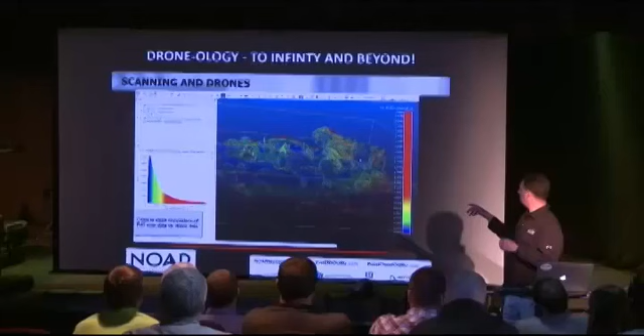Most of it is in here, so if you look at the graph, I think the red is the one that's the least accurate right now. Whenever you fly a drone, always go outside the limits of the project, because if you get the horizon in there, it kind of rolls up the ends of it. It doesn't have anything to match to. So you notice most of the red is going to be around the outside, or the red is anywhere we had a shadow and the scanner couldn't see those locations.

That's a great way to make sure that the data is good. Notice the swimming pool is red. There's no data to compare in there because the scanner didn't pick that up. You see the top of the roof right here is red. There's another roof where there was red, just because there was no scan data in those areas.

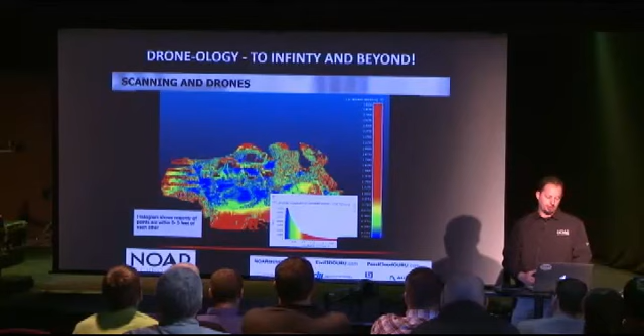So if we take a look again, typically points were within a half foot of each other. You can see the blues where the focus was much better, typically 2/10, and the farthest out was a half foot. Just to give you some ideas.

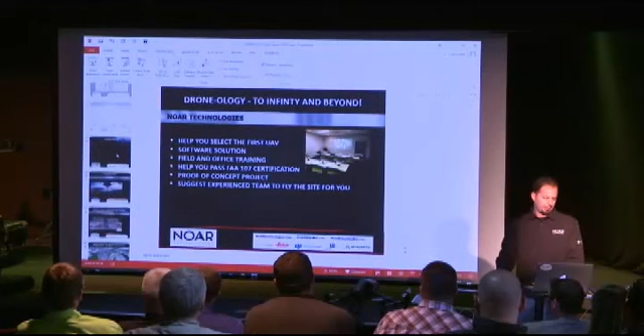Do you remember the 100? What was it, I can't remember the name - Phase One or Hasselblad, yeah, Hasselblad has 100 megapixel. So just like scanning, it's going to be 100, it's going to be 200 - I don't know where they're going to stop. With photogrammetry versus LiDAR, LiDAR is a race to get smaller and more accurate, while photogrammetry is going for the megapixels and better cameras as well.

This is Matt Albright with Mega Monument Engineering. Did you have any comments or anything you wanted to talk about? Or if you want everybody to just come up and say hi if they have any questions - sure, as well, you want to catch me after?

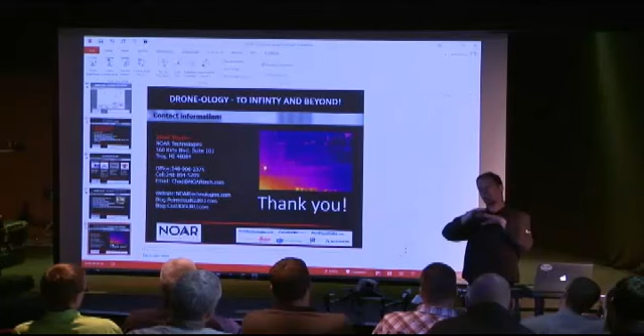We did see on one of the bigger facilities we flew, it was visual inspection, so we didn't have to have it, but we just put control around the outside and not on the roof. It came back incredible, looked great, but when we went back and did further inspection, it had over 1 foot of drift. If you take photogrammetry and there's a little bit off on each stitch, putting enough together it starts bowing - either up and across or down. In this case we had a foot where it went up like this. If we would have tied control on the roof, it would have taken that bow and tightened it back down to where it was supposed to be.

So we learned a good lesson there. We don't know everything about control points, but we know enough now - hey, we got to do this, tell you where to put them, and check your data. There's scan data, any point cloud data - always inspect it as much as you can. I know it takes time, we're always in a hurry, deadlines are always there, but it's better than putting out something that's not very good. Your name's attached to that, so it's worth the time to inspect it and look at it.